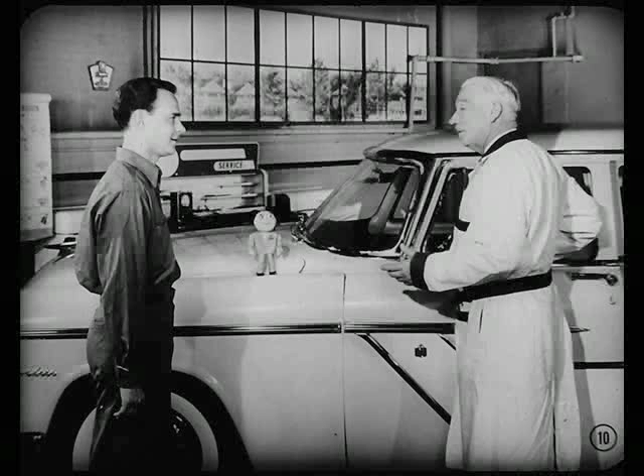That's why it pays to run a road test first. You get a double check on the owner's report and find out firsthand what the exact condition is. It sure hit the jackpot in this case. This job's really got a rough downshift, all right.

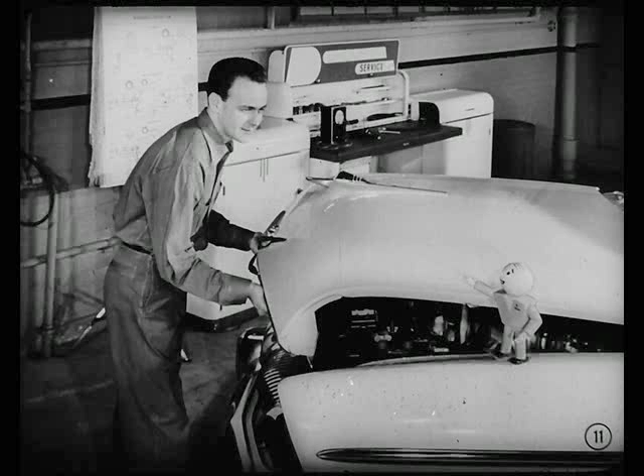Guess we'd better take the transmission apart so we can see what's wrong inside, right? No, wrong. That's the last thing to try, George. On Powerflite, you can fix almost any harsh shifting condition just by making sure the linkages and pressures are adjusted right. So stay on the outside, my boy. That's right, George. You rarely have to disassemble the transmission.

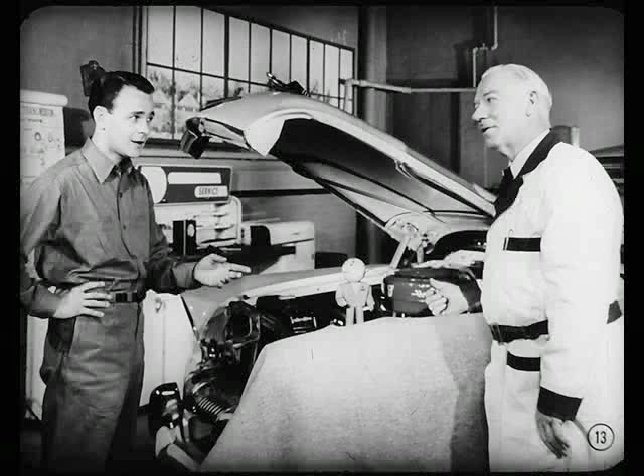Okay, masterminds, what adjustments are we going to make on this car, then? Well, we know from our road test that the selector linkage is all right, so we'd better check the throttle linkage adjustment first. Maybe you think we go overboard on that subject because we keep telling you to check linkage and throttle pressure every time. Yeah, you guys act like throttle pressure is the answer to almost any transmission condition.

Well, it is, just about. The sooner you get in the habit of checking linkage and pressures first, the sooner you realize how important it is. Okay, so I'll check throttle linkage first. But what for? For the proper setting, of course, and for binding. After all, there's a series of connections between the accelerator pedal, the carburetor, and the transmission. You want to be sure it's set properly and operating freely.

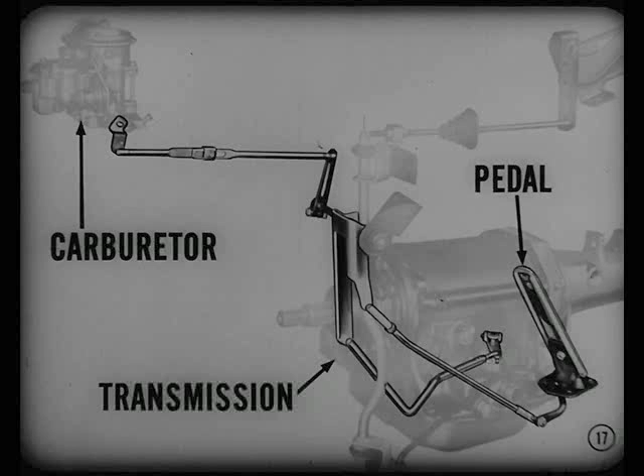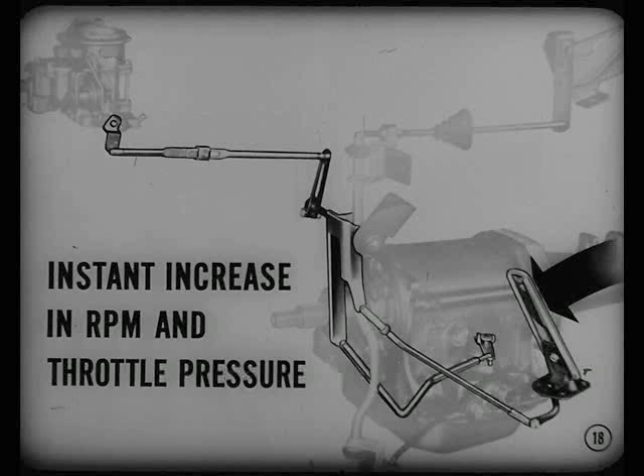So each time you depress the accelerator, there'll be an instant increase in both engine RPM and throttle pressure. And what's more, engine RPM and throttle pressure have to be right to start with. If there's any binding or interference in the linkage, it could cause a delay between the increase in engine RPM and the increase in throttle pressure, and you'd get a harsh shifting action. That's why it's so important to have the right throttle linkage and pressure adjustment.

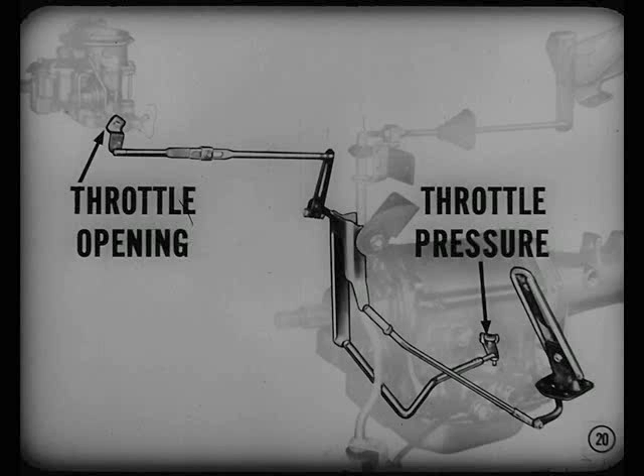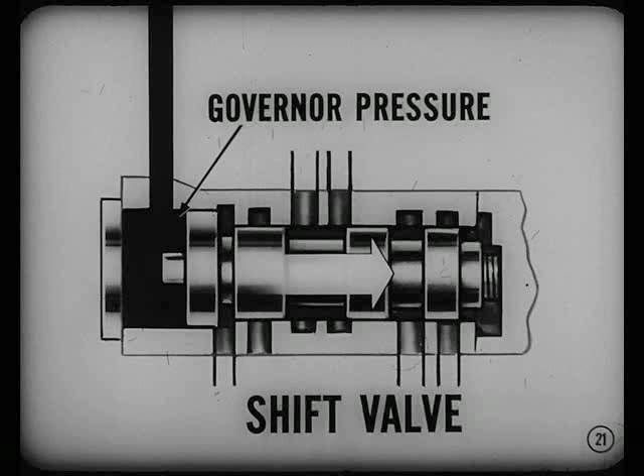I'll bet George would understand the linkage tie-up better if you covered what goes on inside the unit. Yeah, good idea. Throttle linkage, George, helps control the road speed at which the transmission shifts because it controls carburetor throttle opening and throttle pressure. Opening the carburetor throttle increases engine RPM and road speed until governor pressure at the shift valve increases enough to cause an upshift. Remember, Lloyd's talking about what should happen, George.

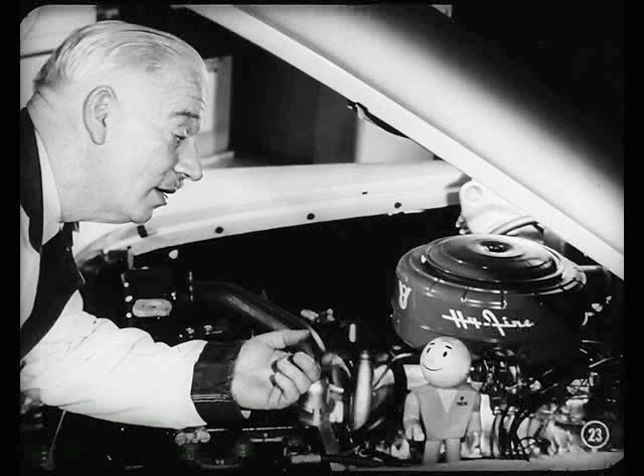It won't work unless the linkage is properly adjusted and throttle pressure is on the nose. Very true, Tech. We got to have 13 to 15 pounds throttle pressure at an engine idle of 475 to 500 RPM. And there should be an immediate increase in throttle pressure when the carburetor throttle opens slightly.

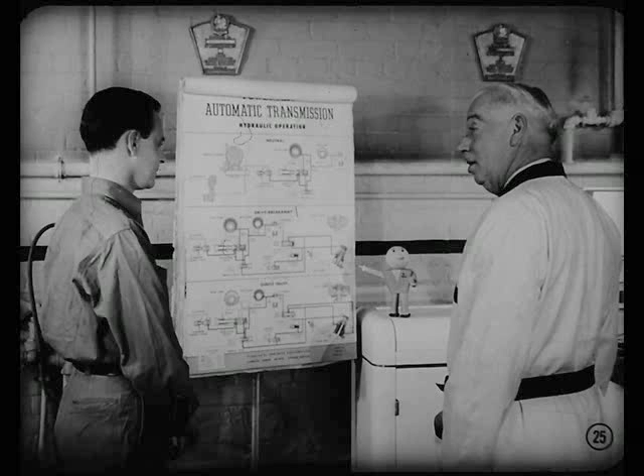I see. Now, is that why you told Mr. Top you thought throttle pressure on his car was too high? That's part of the story. There are other causes of the condition he mentioned, but I know the effect high throttle pressure has on downshift smoothness. Well, George would understand that better too, Lloyd, if you rubbed his nose into that chart and explained what happens in a normal downshift. Good suggestion.

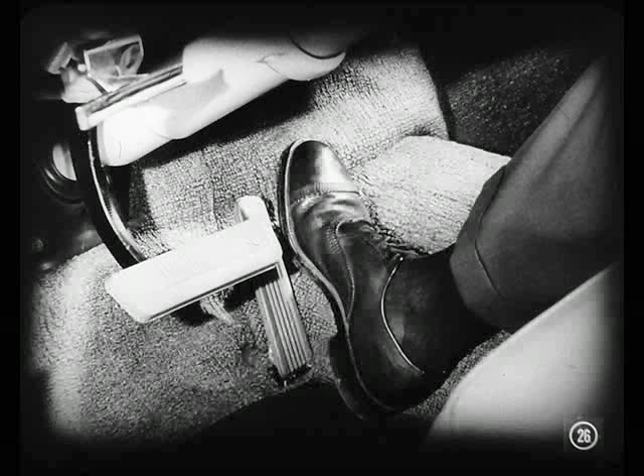We'd better go into that. When you take your foot off the accelerator pedal, George, the carburetor returns to idle. Throttle pressure should be 13 to 15 pounds.

Now, in the transmission, the shift valve is in upshift position. One of the valve lands closes off throttle pressure, so only the shift valve spring can start moving the valve into downshift position.

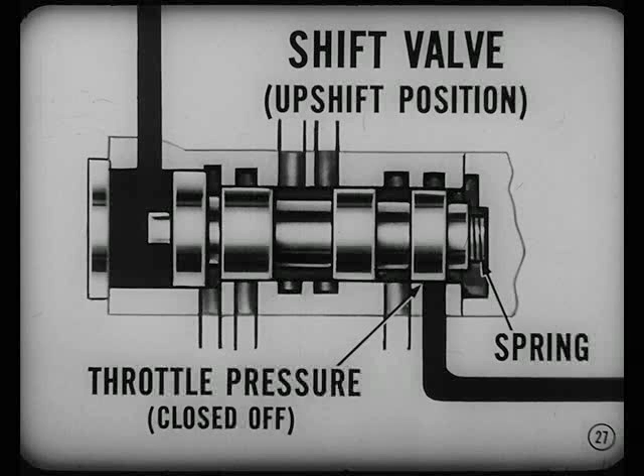At the other end of the shift valve, governor pressure falls off when road speed slows down. When speed falls to about 11 miles per hour, the spring overcomes decreasing governor force and begins moving the shift valve to downshift position.

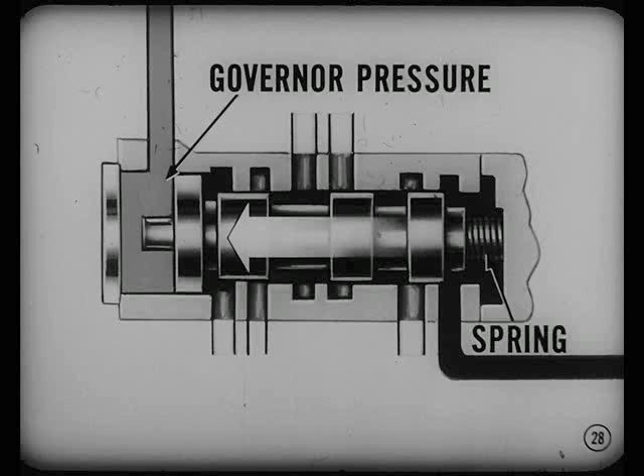This movement uncovers the throttle pressure passage, so throttle pressure moves in and helps the spring push the shift valve to downshift.

Moving that valve to downshift relieves line pressure from the off side of the kickdown servo piston and the direct clutch. This permits the clutch to release and the kickdown band to apply.

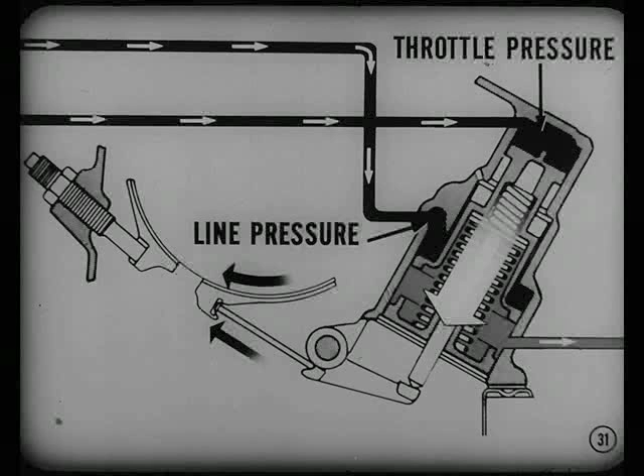Remember, the kickdown band is applied by a combination of line and throttle pressure on the apply side of the kickdown servo piston. Well, that I can follow. But how is knowing it going to do me any good?

Well, it tells you how important proper throttle pressure is. And unless you know what happens during a normal downshift, you can't appreciate the job done by the servo restrictor valve. The servo restrictor what?

That's a little understood valve in the system, George, but it does a big job during downshift. Lloyd can give you the story. The servo restrictor valve slows down application of the kickdown servo piston during normal downshifts, so the kickdown band will engage smoothly.

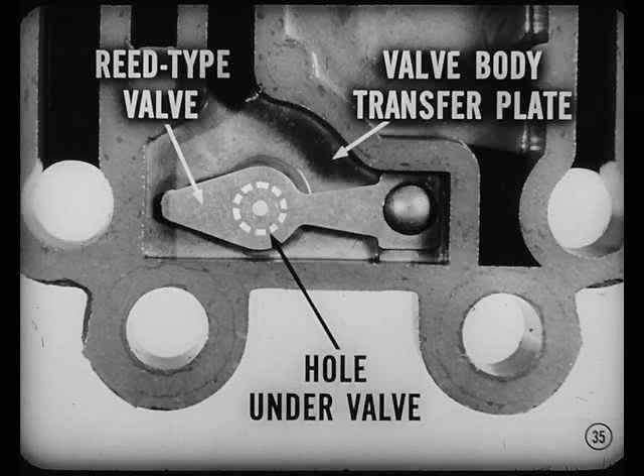It's like a tiny dash pot in the system. What the heck does it look like? It's a spring steel reed-type valve.

One end is fastened to the valve body transfer plate. The other end, shaped like an arrowhead, can lift up and down to cover and uncover a hole under the valve. Fluid at line pressure is admitted through this hole to the apply side of the kickdown servo.

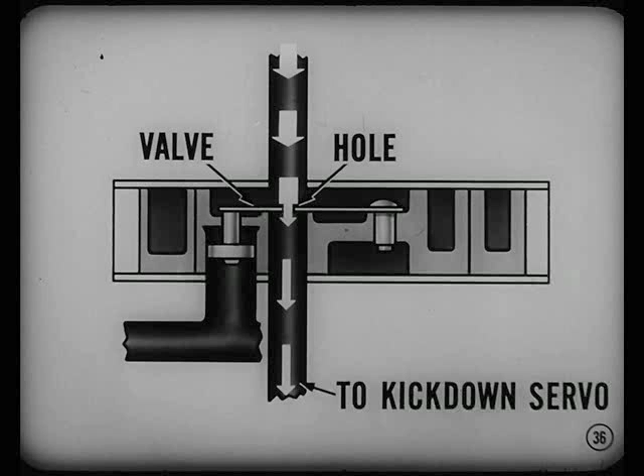Something like a mouth organ reed. In general, yes. Instead of air, this valve controls the flow of fluid. A small hole in the arrowhead end lets fluid flow slowly to the kickdown servo when the valve is closed.

An operating plug, like a plunger, is in a recessed hole on the other side of the transfer plate. It contacts the free end of the valve when pressure calls for it. Which pressure works that plug?

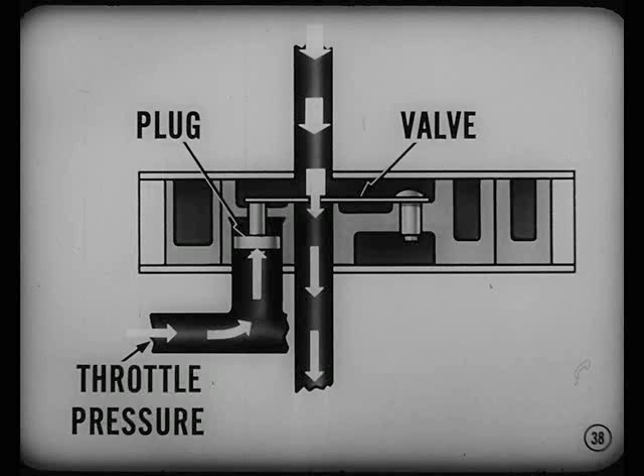Throttle pressure, George. It moves against the large end of the plug. At engine idle, remember, throttle pressure is only about 14 pounds, and this doesn't supply enough force to open the valve. When throttle pressure gets higher, the plug bends the valve up and opens the servo restrictor valve.

That lets fluid flow unrestricted around the valve to the apply side of the kickdown servo. I think I get it now. The servo restrictor valve is closed when you lift your foot off the accelerator pedal and throttle pressure is less than 15 pounds.

Well, that's what's supposed to happen when the car slows down for a stop. In other words, when road speed slows to about 11 miles, a downshift is called for by the shift valve.

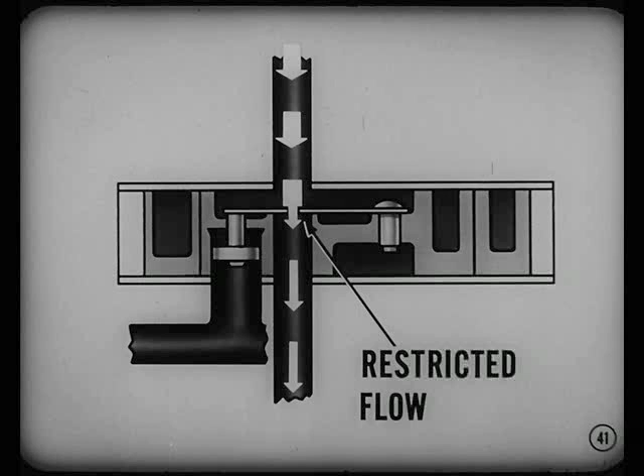Application of the kickdown band is slowed down by the restricted flow of fluid through the small hole in the servo restrictor valve. As a result, you'd get a smooth engagement of the kickdown band and a smooth downshift.

Yeah, and by this time, George, anyone can plainly see why too high a throttle pressure can cause a rough downshift. Well, I must be a little blind, Tech, because I'm still confused.

Look, George, if that servo restrictor valve is held open because throttle pressure is too strong on the plug, there'll be a rush of fluid at line pressure to the apply side of the kickdown servo.

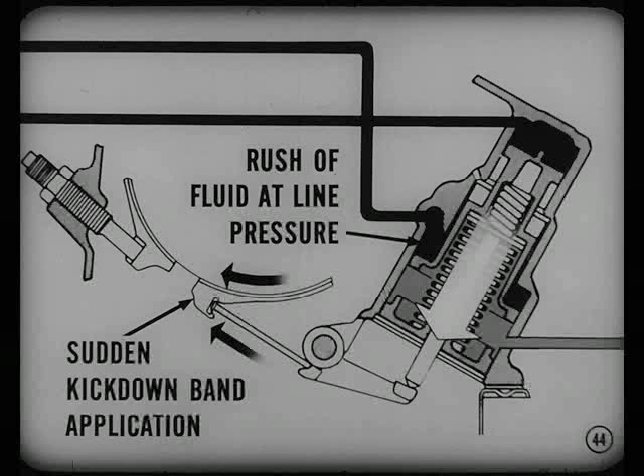That sudden rush of fluid into the servo will cause a sudden kickdown band application. The downshift will be rough, and it might even sound off.

Ah, now I get it. Too high a throttle pressure keeps that servo restrictor valve open. Bullseye, George. Hooray!

But before you and I get into the fix, somebody better turn this record over.

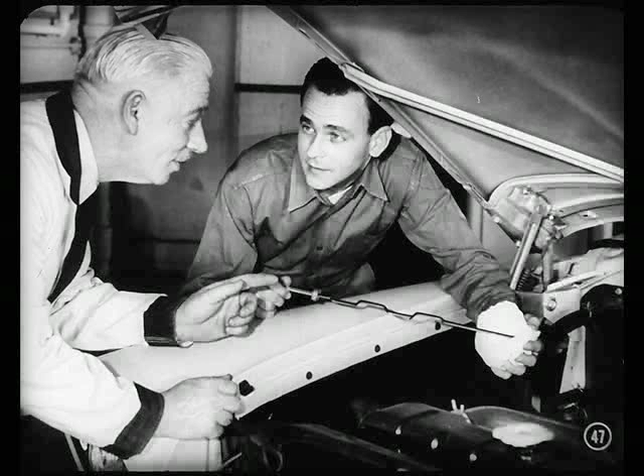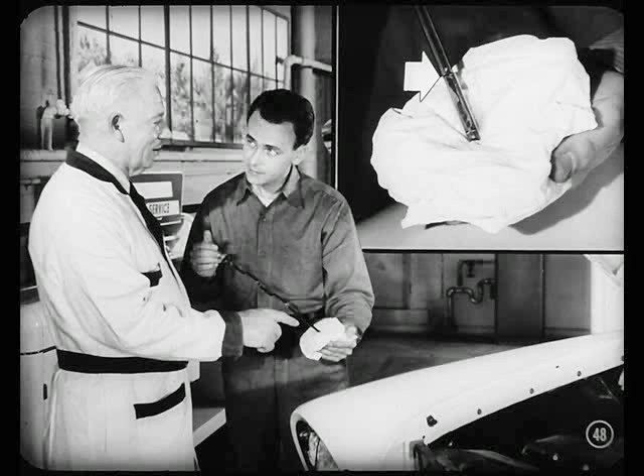To correct any transmission condition, we always begin by checking the fluid level when the engine's idling. The transmission's warm and the fluid level's right up to full. Fine, that rules out low fluid level as a possible cause.

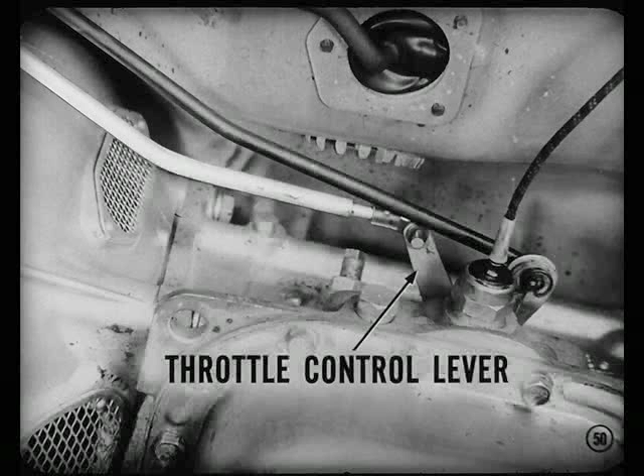That rules in wrong throttle linkage adjustment or incorrect throttle pressure adjustment. Either of those possibilities can cause too high a throttle pressure. So let's look the linkage over, looking for bent parts and possible interference.

Move the transmission throttle control lever and see if it returns freely to its stop. If not, you know what to do. Linkage works fine, no binding anywhere.

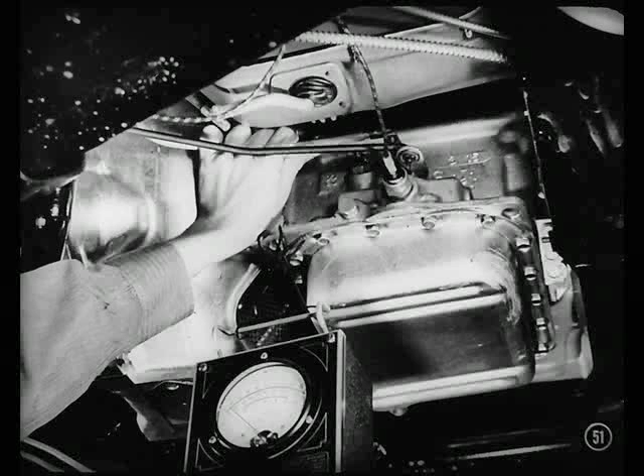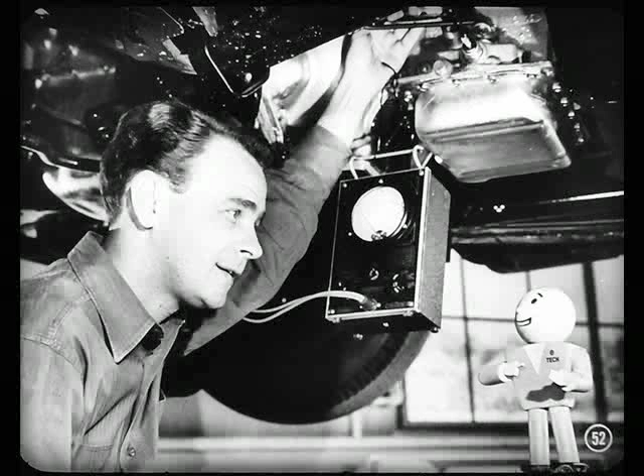Now make sure the engine idles at 475 to 500 RPM in neutral. Then you can check the throttle linkage for improper adjustment. Hate to disappoint you fellas, but I can't do anything about this linkage setting, it's absolutely okay. That narrows down the field.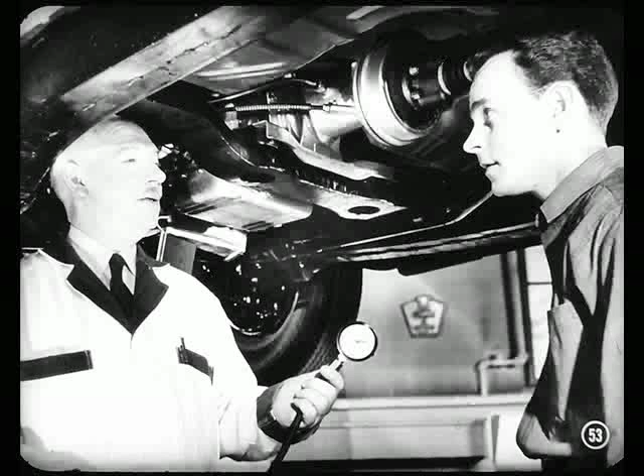Do we check the pressures next? We sure do, checking pressures is a must. Use this 300-pound gauge and test line pressure first. Unless it's right, all other pressures could be wide of the mark.

Line pressure's okay: 250 in reverse at 1,600 RPM, and it's just under 90 pounds in the other ranges at 800 RPM. So far, so good. Now let's get at that throttle pressure.

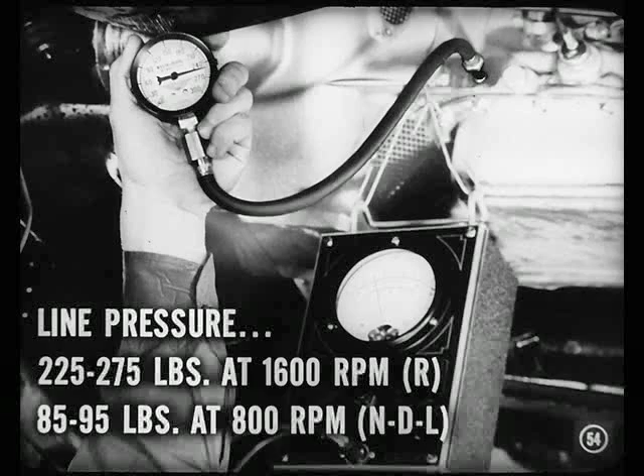Remove the takeoff plug, then use this 100-pound gauge and see if you get 13 to 15 pounds with the unit in drive and the engine idling. Will do, Lloyd, just give me a minute.

This transmission's got about 18 pounds throttle pressure, Lloyd. That must be our trouble, hey? No question about it, George. That's what's giving Mr. Top that harsh downshift.

You know what to do? Well, I've got to adjust that throttle valve and bring the throttle pressure down to 14 pounds. That's the stuff, George. Catch the oil that will drain out when you remove the plug.

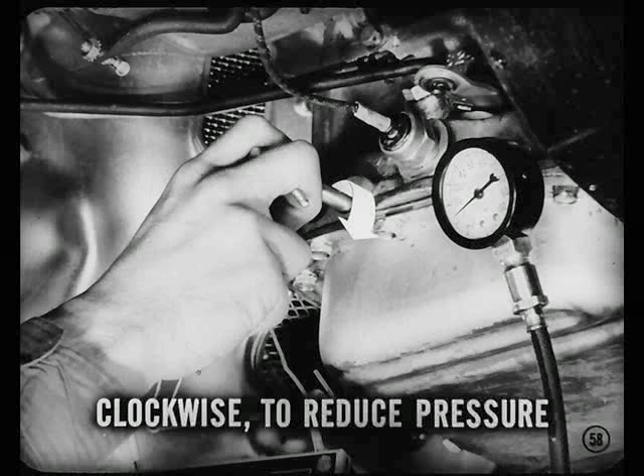Watch the gauge as you adjust throttle pressure. Turn the wrench clockwise to reduce pressure to 14 pounds. 14 pounds is what I get.

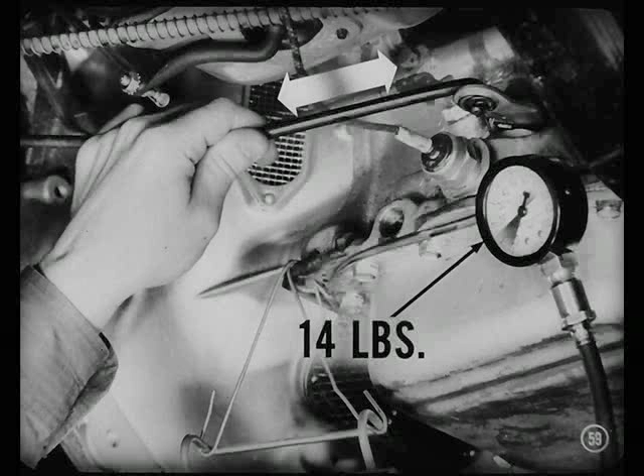Shift the manual lever a couple of times between neutral and drive and see if pressure comes back to 14 when the lever is returned to drive. She checks out okay, still 14.

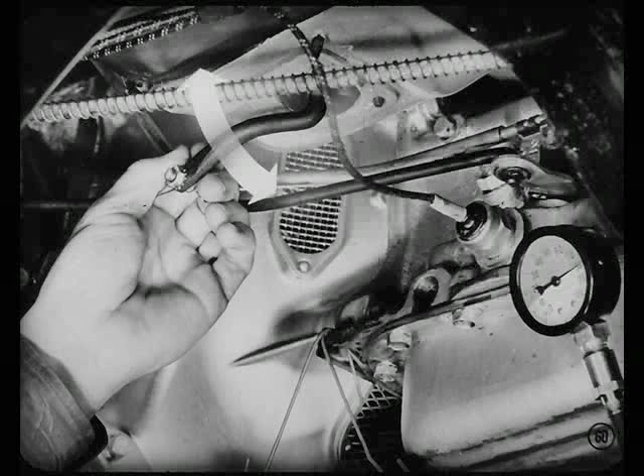Now snap the throttle wide open quickly once or twice. You should get a momentary increase to about 80 pounds on the gauge. Say, we're doing okay on that too.

Good going. Reinstall the plug and torque it to about 25 foot-pounds. Add fluid to replace the fluid that drained out, then we'll run a road test. All right, I'll have her ready to go in a jiffy.

So correcting the high throttle pressure really improved the downshift. Mr. Top's going to be happy with this job. It's a smooth working unit, all right.

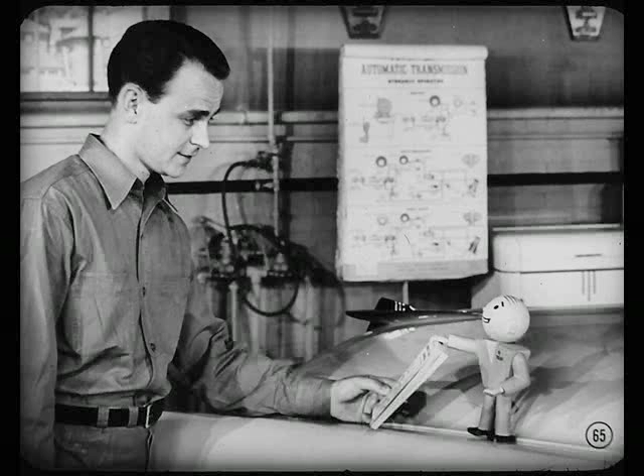What if the unit still had a rough downshift? Then we'd adjust the kickdown band and road test it again. If that didn't work, we'd have to remove the valve body assembly and check it over. And if that didn't do it, then we'd pull the whole transmission. You'll find that inside story in this reference book, George.

But almost all cases of rough, closed throttle downshifts are due to incorrect linkage and pressure adjustment. I see, so the fix we used will pretty well handle that condition.

That's the idea, pal. Now I've got a suggestion, let's talk about another condition: that occasional case where the engine flares up during downshift at part throttle. Yeah, George ought to know about that.

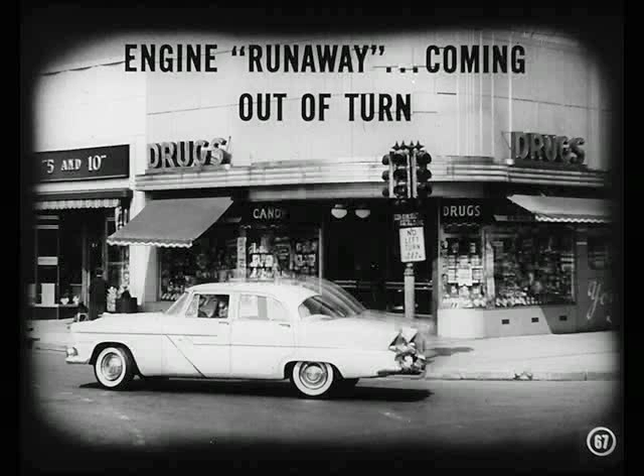An owner may tell you he notices the engine tends to race or run away right when he's slowed down for a turn and starts to accelerate coming out of the turn. Or this might show up when he slows down for a traffic light that suddenly changes and he tries to pick up speed again. In either case, the shift valve moved to make a normal downshift due to the slowdown in speed. Now, if the unit were working properly, the kickdown band would engage and the downshift would be completed quickly.

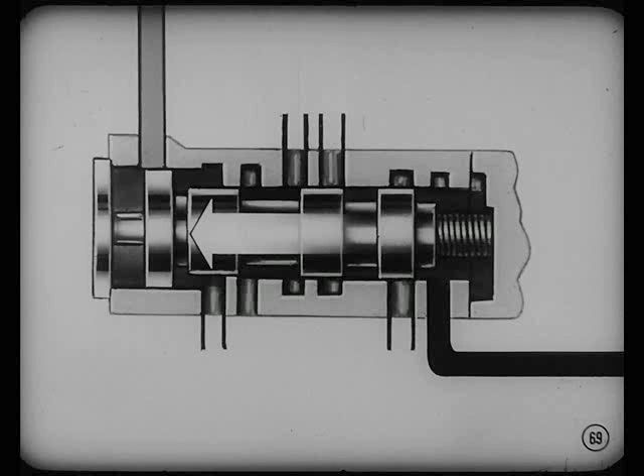You mean, in this case, the downshift is delayed? Not the action of the shift valve, but the kickdown band application, George. That's what isn't completed when the owner steps on the accelerator. So the engine flares up for a minute, then the band applies and the car lurches forward.

But before we diagnose this condition, it'll help if we talk about what happens during a normal downshift at part throttle operation. Okay, what does happen?

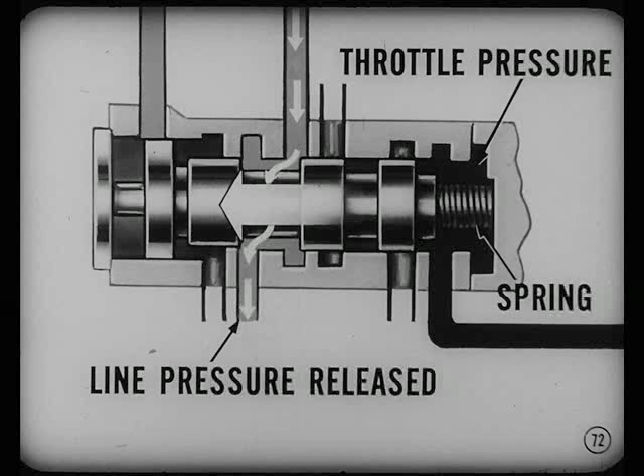Well, when the car slows to about 11 miles, the shift valve spring and the throttle pressure combine to move the shift valve to the downshift position. That opens passages and line pressure is released from the direct clutch and offside of the kickdown servo.

But right about there, the driver steps on the accelerator, so the downshift has to be completed with the carburetor throttle partially open. Depressing the accelerator slightly opens the carburetor throttle and increases engine RPM. It also increases throttle pressure.

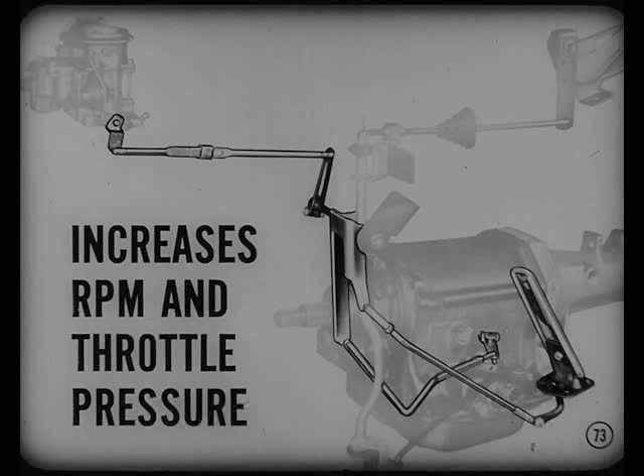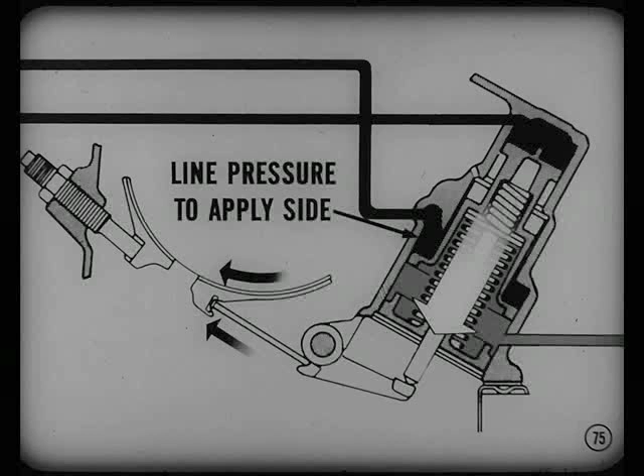Increased throttle pressure against the servo restrictor valve operating plug opens the valve and lets fluid at line pressure rush down to the apply side of the kickdown servo piston. Since line pressure was released from the piston's offside when the shift valve moved, this sudden introduction of line pressure to the apply side of the piston causes the kickdown band to apply instantly.

As a result, the transmission is quickly engaged in downshift, and the increased engine RPM at part throttle provides instant acceleration. Very good, Lloyd, but remember, that's what is supposed to happen.

Right. In our condition, something keeps that from taking place, and you get that hesitation and engine flare-up before the car accelerates. Now, that, of course, means that neither the direct clutch nor the kickdown band is engaged. Since the kickdown band engages when the direct clutch releases during a normal downshift, there's something holding up the band engagement.

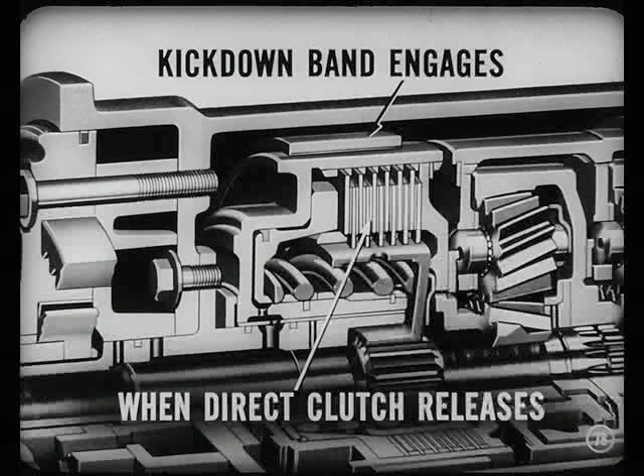I thought the servo restrictor valve was supposed to slow down kickdown band engagement for a smooth downshift. It is, but at part throttle, the servo restrictor valve should be open to allow for immediate application of the kickdown band. In other words, the servo restrictor valve, in this case, isn't opening soon enough.

Yeah, and since throttle pressure operates the servo restrictor valve, it usually means the throttle pressure is too low. Right, it's too low to open the restrictor valve the instant the driver's foot touches the accelerator.

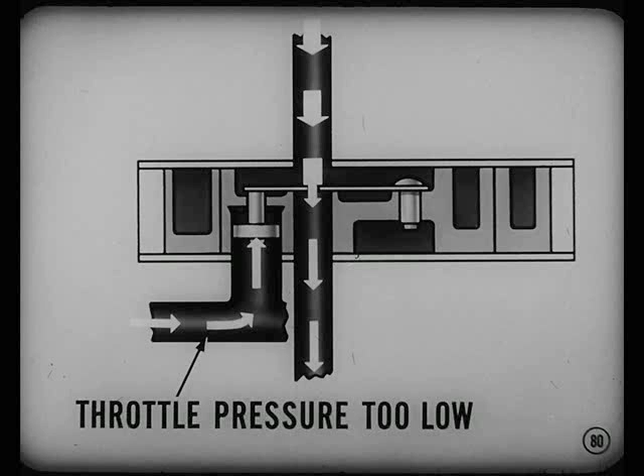Remember, throttle pressure too high gives a harsh downshift. Throttle pressure too low causes engine runaway at part throttle. So, throttle pressure must be adjusted properly.

And we should just go ahead and check throttle pressure? No, you go through the same steps you did when throttle pressure was too high. You mean check fluid level first and then throttle linkage?

Sure. If there was free play in the linkage, or the linkage wasn't adjusted right, you'd fix it before doing anything else. Okay, suppose I found fluid level okay and the throttle linkage okay. Then if I adjusted the throttle pressure, would that correct this runaway condition?

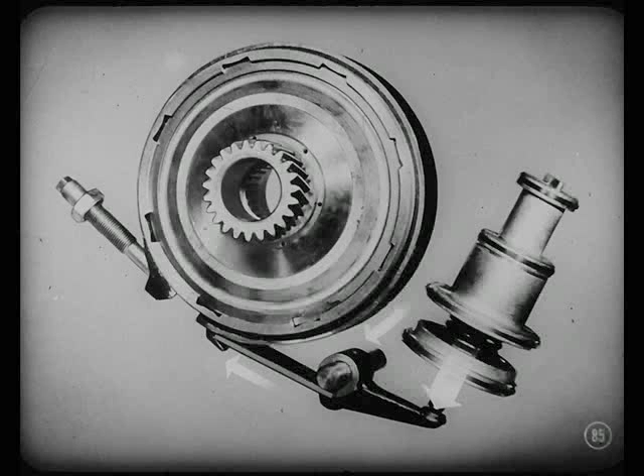It sure as shooting would if the kickdown band adjustment were okay. Yeah, a kickdown band too loose makes the kickdown servo piston travel farther before engagement. This could give the engine a chance to rev up before the band made contact.

I got you, Lloyd. After checking all these points, level, linkages, throttle pressure, and kickdown band, we'd road test the car. Right, oh boy, and then you'd really know what the shifting quality was under all conditions.

And if your road test showed that the condition hadn't been corrected, you'd have to remove the valve body assembly and check it. If that didn't do it, remove the transmission for further checking.

Well, you fellas sure cleared up these downshift cases for me. I've got a better picture of Powerflite operation, too.

Glad you have, George. We just gotta keep up on transmission maintenance. Truer words were never spoke, Lloyd.

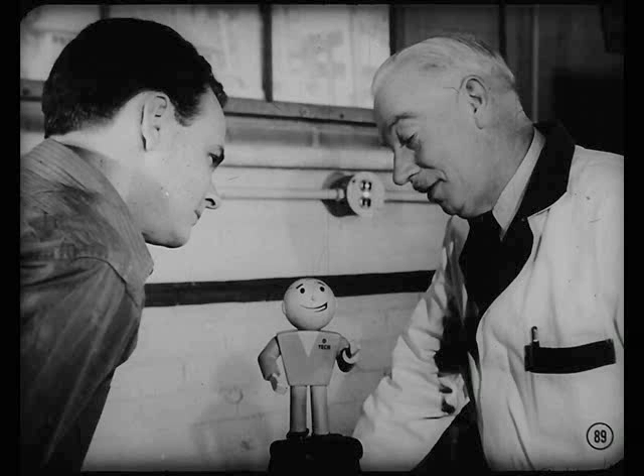I'll bet you there are more than 1 million Powerflites running around, and more are on the way. Keeping those units working smoothly is our best bet to keep our owners sold on our product. But even more important, it keeps them sold on us.